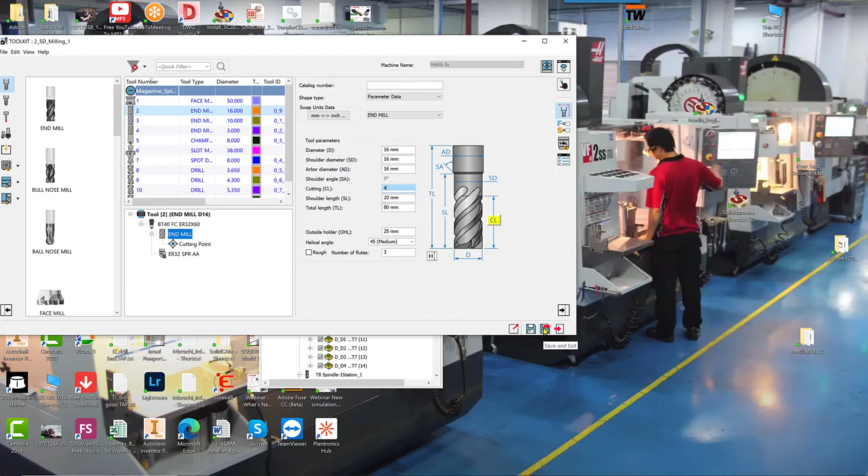Now, obviously, there's some tool changes that have to be made here. I'm not going to calculate all of these and only calculate the ones I needed, but let me go into this pocket operation. If I take a look at the pocket operation, I'll note the following: if I go into my levels, my step down is every 6 millimeters. Now, I know my tool can only cut 4 millimeters, so I'll make a change over here of 4 millimeters.

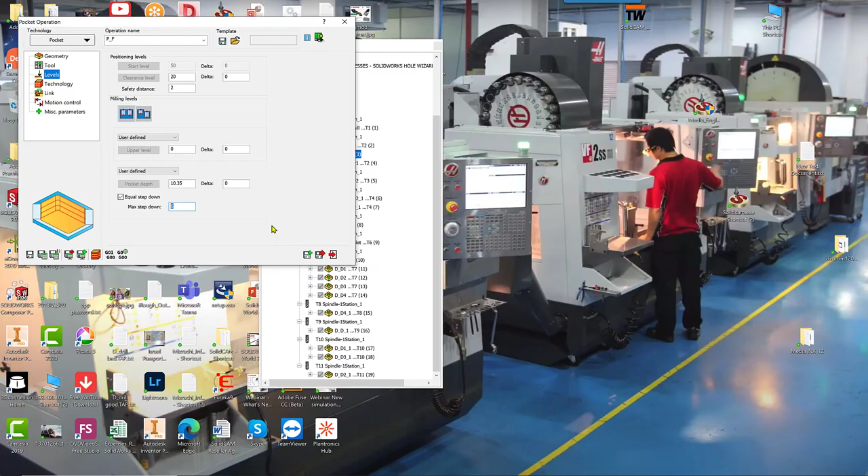I may also want to make a change in my speed or feed rate. So let me go to my data of my tool, and I can make any changes I may need over here. For instance, I can make my feed rate at, say, 1,800 and change my spin rate if needed. I'm just going to leave it the way it is.

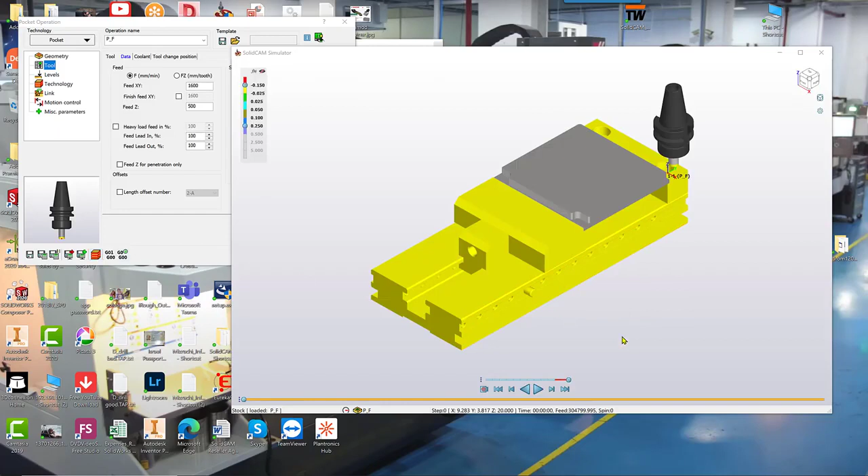And now I'm just going to do save and calculate. Now I'm going to run my new SolidCAM simulation. And you'll see now we have a shorter tool, and when I do the simulation, you'll see now it goes down in many step downs.

Now I'm going to do this also on a different part. I'm going to load a different part that has HSM in it. Again, you can see all the operations, all of them. I can make any kind of change I want, if necessary, all these minor changes I may need. I'm just going to run the simulation this time.

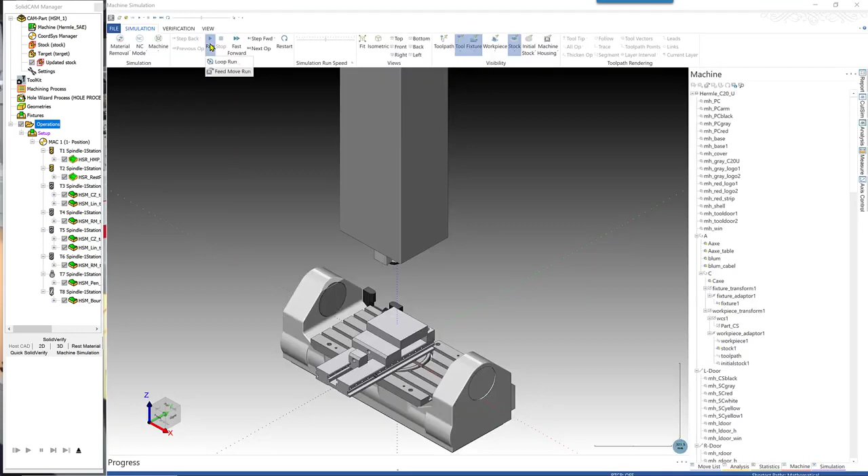This time, however, when I run my simulation, I'm going to use the machine simulation. So I'll go to simulate, I'll go to machine simulation, and you can see that for anything I've said about making a new part, we can basically do just about anything needed on the shop floor. We can see the actual machine simulation here as well. I'll just run it, and you can see that we see our full machine simulation.

Okay, let me stop this. Now, you've noted that I've been running this as an external program, as a standalone program of SolidCAM Shop Floor Editor. But this runs just as well if it is integrated. Now, why would I want to have it integrated? Well, there are times you may want to have the machinist see the actual model.

So if I were to run SolidWorks with the Shop Floor Editor, he'll be able to see everything as far as the model, but again, will not be able to do any new operations, but will be able to edit any of the old ones to make those minor changes. You'll see again, if I go into this operation over here, I'll make the exact same changes that we did the last time, just in the opposite direction. I'll go into my toolkit.

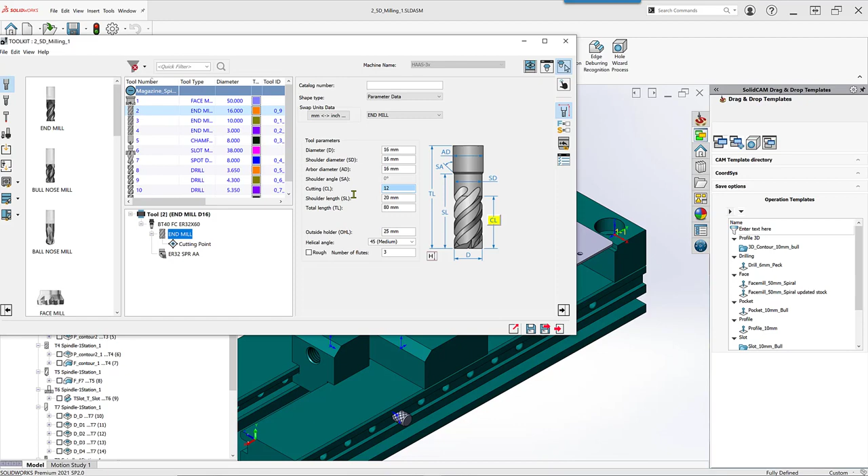I'll change this tool back to a 12 millimeter cutting length. I'll accept those changes. I'll go into this operation, change my step down to every 6 millimeters, what it was before. Save and calculate. I'll actually run save and calculate on all so that I can have all of my operations calculated, including those two over there.

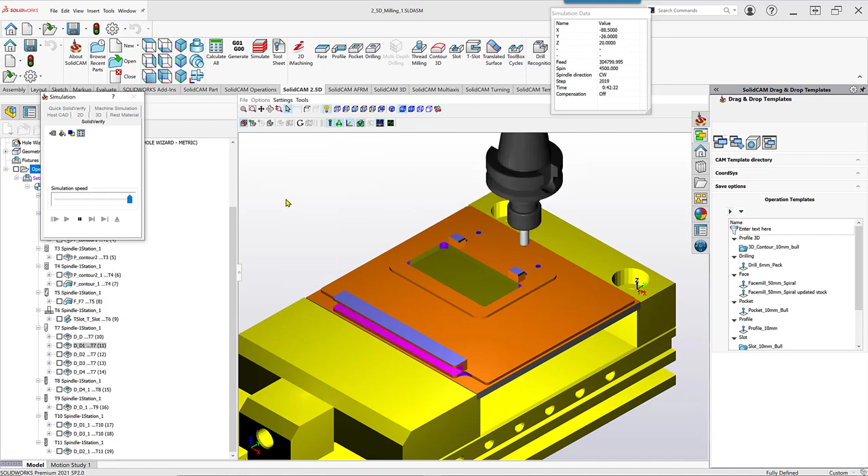And this time I'm going to run my SolidVerify simulation. Just go into SolidVerify this time. And you see all of these verifications that we have are available to us inside the SolidCAM Shop Floor Editor. Again, I'll open up the HSM part. And just as before, you'll see that I cannot create any type of new operations, but the editing is something I still can do inside the Shop Floor Editor.

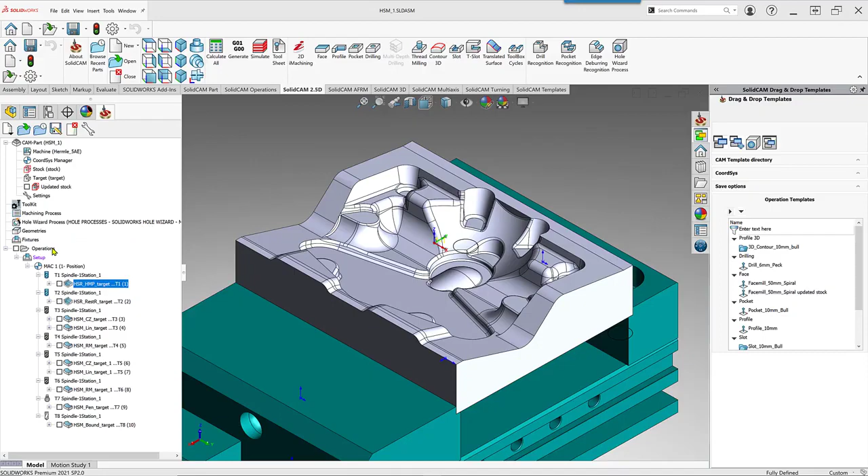I'll run my machine simulation this time on the entire part. And you can see that the Shop Floor Editor allows for the full machine simulation as well.

Now, in addition to the SolidCAM Shop Floor Editor, we now have a new product called SolidCAM Shop Floor Simulation. If I were to run this particular program, this will allow us to do exactly what we've done in the Shop Floor Editor with some differences. The difference basically is that over here you can only see the simulation, you can see the operations, but no editing can be done. You can also create the G-code if necessary.

Let me just open up a part, and you can see that if I go to an operation, right-click, we have the options of viewing the operations, creating the G-code, and running our simulation. If I go to view, you'll note that I cannot save anything that I have done here. Everything is only for viewing. If I wanted to run my simulation, I can right-click and run my simulation.

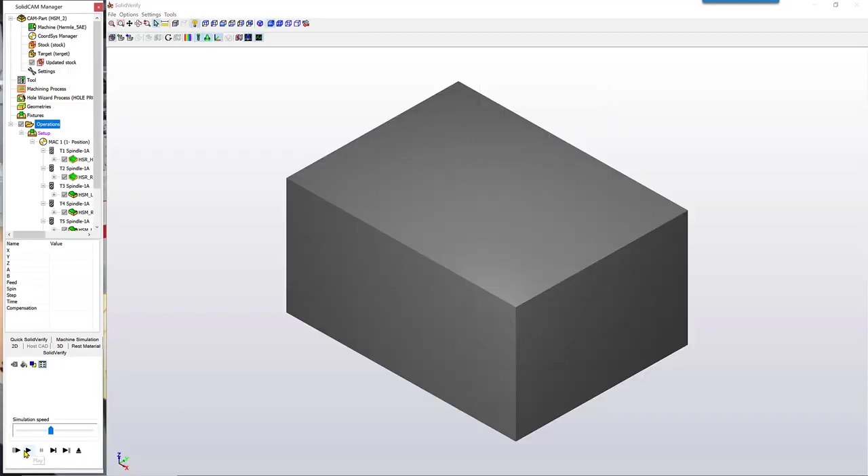Let's first run our SolidVerify simulation. And you can see it's just like any other simulation that you've seen on your regular station. I'll stop this for now. And I'll even run my machine simulation. In my machine simulation, you can see, again, everything that you've seen before in your regular station.

The advantage of having the SolidCAM Shop Floor Simulator is that it also allows the programmer to give the actual program to the machinist, but will not allow him to do any editing. So he doesn't have to worry about any editing being done by mistake. This is meant solely for the machinist to see exactly what is going to be happening on the machine.